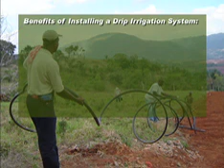Installation of a low-cost drip irrigation system will ensure uniform watering and growth, and in the end, a healthier crop. There are many benefits to installing a drip irrigation system. The exact amount of water needed by the plants can be applied. Because the water is applied precisely, it is also conserved.

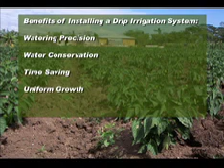Watering is done all at once and in a timely manner. Plants grow uniformly as they receive similar amounts of water and nutrients. Fertilizers and other chemicals are applied directly to the root system.

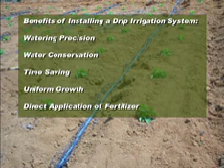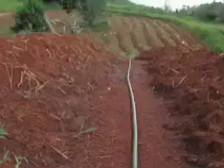Tools used in drip irrigation include a fresh water supply. In areas without streams and rivers, or when water is scarce during the dry season, a water tank is essential. A drip hose, which is also called manifold pipe. A drip line. A pump.

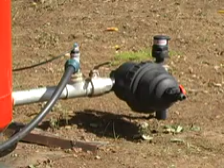A gravel filter, which is used to filter out the silt and impurities in the water. A screen filter, which is used when the water source is of good quality from wells or springs. Or it may be used as a secondary filter to the gravel filter when the water is very dirty.

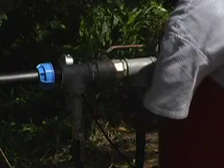Valves, which are used to control water pressure, as well as the water direction. They are especially important in the maintenance of drip irrigation systems that use water from a natural source, because in changing the direction of the water, the filtration system is washed out in a procedure called backwash.

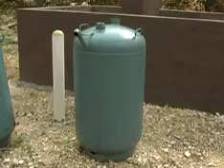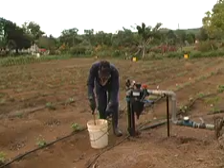A fertilization tank. Fertilizers and other chemicals may be applied through a drip system using a tank such as this. A Venturi pump. Venturi pumps can be used to inject agrochemicals into the drip irrigation system. Venturi pumps create a vacuum, which draws the agrochemical mixture into the drip system.

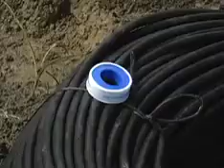The advantage of these pumps is that they need no external energy supply. Their main disadvantages are cost and the inability to pump large volumes. A hacksaw. Wrenches. Glue. Tape. A borer or puncher. An inserter. Head connectors.

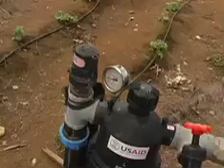A pressure gauge. These drip systems are called pressurized systems because they are designed to work at specific pressure ranges. It is important to use a pressure gauge so that the system's pressure can be monitored.

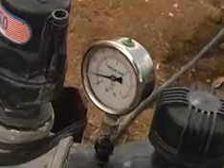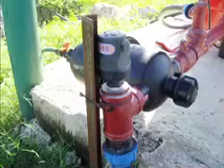Air valves. Because this is a pressurized system, it has to be a closed circuit. Anything inside the pipes can alter the efficiency of the system considerably. One of the most common problems is air bubbles, and the best way to avoid them is by using air valves, which are usually placed on the higher spots of the irrigation system.

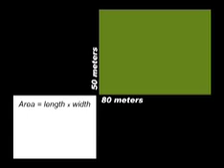Step 1 is calculating the amount of drip lines needed. When calculating the amount of drip lines, you must first determine the area of the plot. As we learned before, that is done by multiplying length times width. Again, our plot is 80 meters by 50 meters. So the area of our plot is 4,000 square meters.

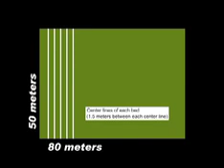Now you must divide the area by the width between beds. As we learned in the plantlets section, Fintrac recommends a distance of 1.5 meters between the center of each bed. So 4,000 square meters divided by 1.5 meters equals 2,667 meters. If more than one drip line is needed per bed, the total calculated length of single drip line needs to be multiplied by the number of drip lines required per bed.

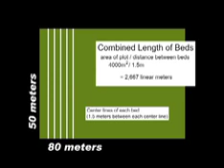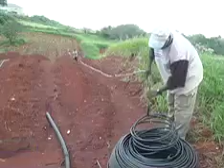Step 3 is laying down the manifold pipe. The manifold pipe is very cumbersome to work with. Many field hands should be working to lay down the pipes so that they stretch across the land. Step 4 is installing the drip line. To install, one person must walk down the field with the line, while another releases it slowly. This way, kinks are avoided, and the line is accurately laid out.

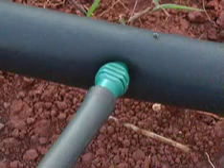Step 5 is making holes in the line. Holes are inserted into the manifold using a borer. Step 6 is inserting the connectors. An inserter is used to insert the head connectors, which will then attach into the drip line. This step should be repeated until all of the drip lines are connected into the manifold pipe.

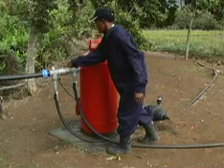The filtration system must be cleaned regularly. This process is called backwash. Water is run backwards through the filter so that the silt and impurities are forced out the way they came in. The resulting spray should be directed to an area without crops and away from the water source.

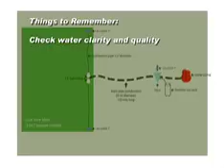Things to remember. Before installing, check your water to determine quality. It could contain minerals, salt, and even some microorganisms, such as algae and fungi. This will help determine the type of filtration system to use. If the plot is less than 10 acres and relatively flat, a drip irrigation design such as the one shown can be suitable to use.

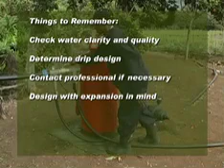However, if the plot is uneven in topography or larger than 10 acres, it is best to seek professional help for both the design and installation. When designing the drip system, always keep in mind the possibilities of expansion. And implement a maintenance program so that the system is kept clean and functional. Remember that drip lines are the most expensive part of your system.